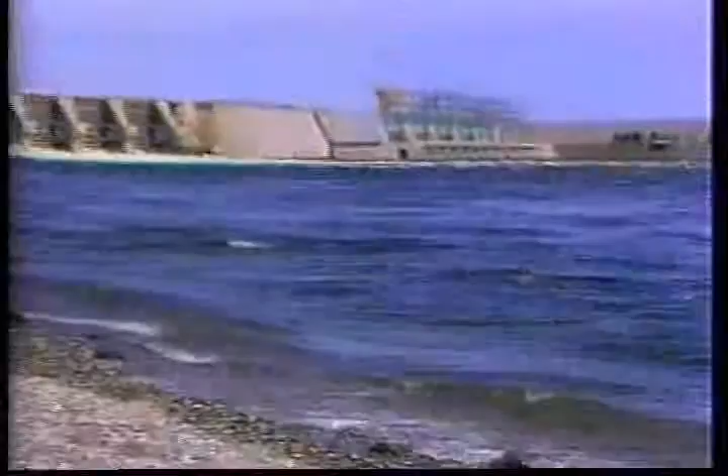The Columbia River Basin, one of the largest in North America, spans 7 of the United States and reaches far into Canada. This 219,000 square mile drainage area includes approximately 3,000 square miles of waterways, lakes, and storage reservoirs.

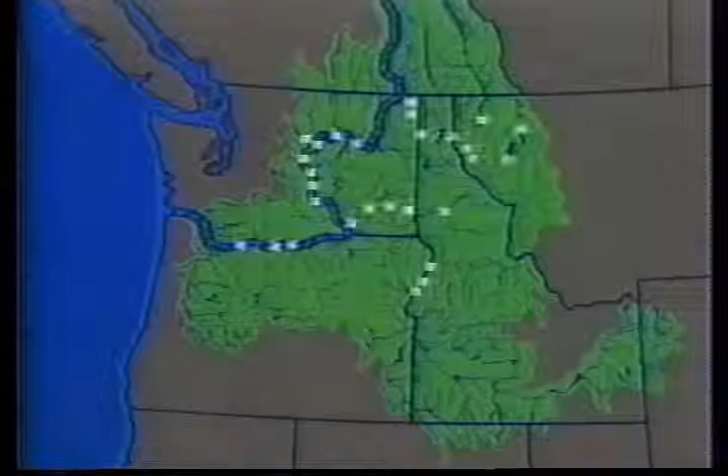Originating in Canada, the Columbia River twists over 1,200 miles and descends approximately 3,500 vertical feet on its way to the Pacific Ocean. In all, 25 dams span the Columbia River and its tributaries, enhancing navigation, fishing, wildlife, and recreation while providing water storage, flood control, irrigation, and hydroelectric power for the Northwest.

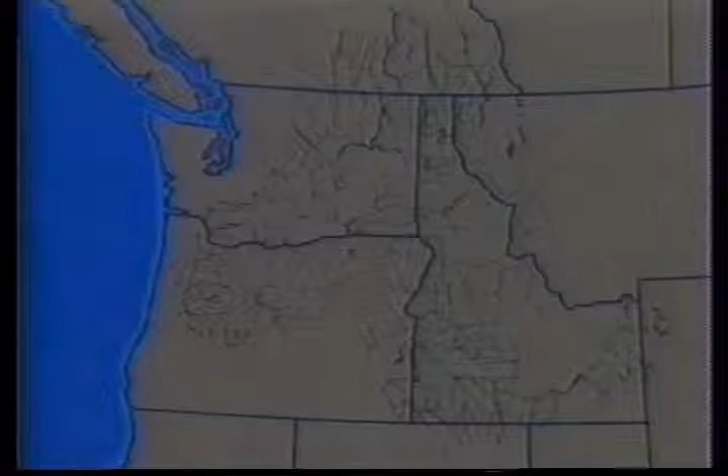This presentation will address the 7 hydroelectric projects located on the main stem of the Columbia in central Washington, but it will focus on the control system known as Mid-Columbia Hourly Coordination that continuously manages the flow of the river through these projects. This 7-dam system includes Grand Coulee, Chief Joseph, Wells, Rocky Reach, Rock Island, Wanapum, and Priest Rapids.

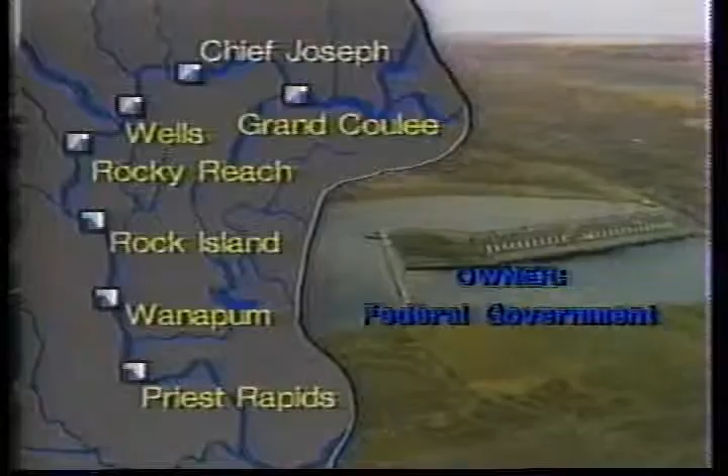Grand Coulee, a federal project operated by the Bureau of Reclamation, is by far the largest in the system. It is the uppermost project and provides priming for the system with over 5 million acre-feet of storage in Lake Roosevelt. Chief Joseph, located 51 river miles downstream from Grand Coulee, also a federal project, is operated by the Corps of Engineers. BPA markets the power generated from these 2 federal projects.

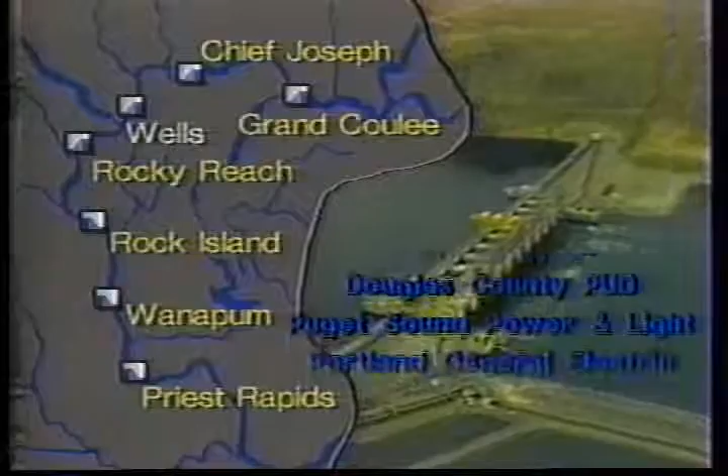Wells is owned and operated by Douglas County PUD. This project is located 30 miles from Chief Joseph. Participants of output from this project include Douglas County PUD, Puget Sound Power and Light, Portland General Electric, Pacific Power and Light, Washington Water Power, and Okanogan County PUD.

Rocky Reach, located about 41 miles below Wells, is owned and operated by Chelan County PUD. Participants of this project are Chelan County PUD, Puget Power, Colockum Transmission, Portland General Electric, Pacific Power, Washington Water Power, and Douglas County PUD.

Rock Island, also owned and operated by Chelan County PUD, is only 20 miles from Rocky Reach. Puget Power and Chelan County PUD share the output of this project.

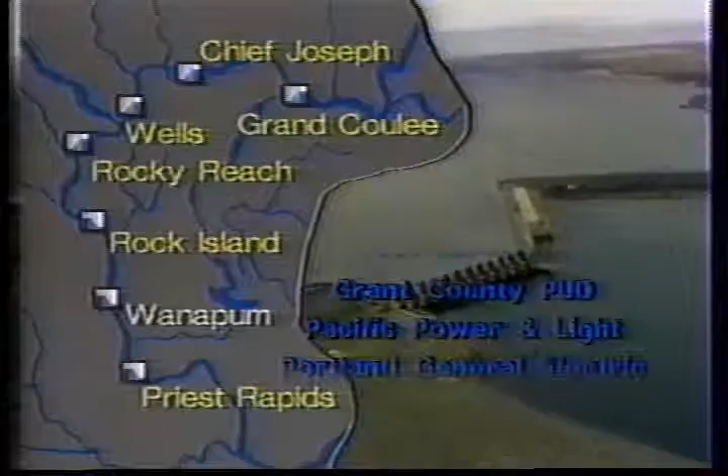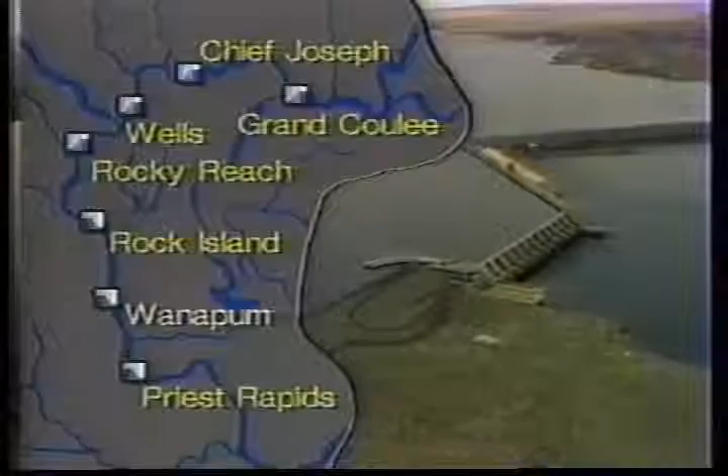Wanapum is located approximately 37 miles from Rock Island and has the largest storage reservoir of the non-federal projects. Participants include Grant County PUD, Pacific Power, Portland General Electric, Puget Power, Washington Water Power, Cowlitz County PUD, Eugene Water and Electric Board, and the cities of Forest Grove, McMinnville, and Milton Freewater.

Priest Rapids, the southernmost project in the system, is 18 miles from Wanapum. Participants include those who share in Wanapum, as well as Seattle City Light, Tacoma City Light, and Kittitas County PUD. The Priest Rapids project, which includes the Wanapum and Priest Rapids developments, is owned and operated by Grant County PUD.

These 7 projects and over 15 participants have united together into the Mid-Columbia Hourly Coordination System. In order to fully appreciate how these 7 projects work together, it's necessary to have an understanding of 4 major characteristics that are common to all projects that affect power generation.

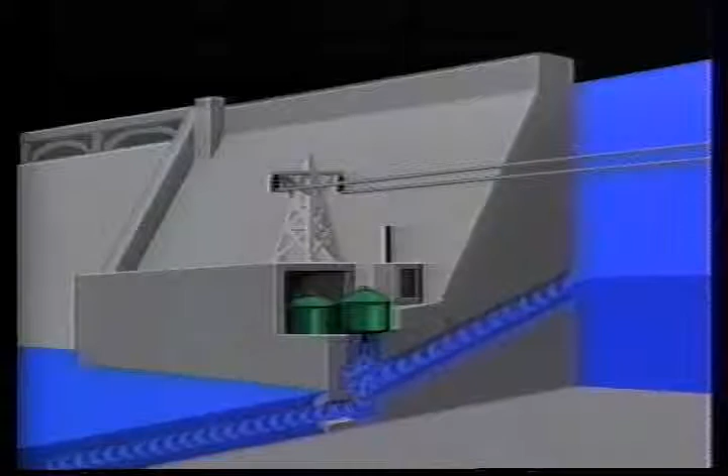This project profile will help explain these characteristics. They are storage, hydraulic head, hydraulic capacity, and generating capacity.

Storage is the ability of a project to impound water. The dark area represents the unusable or dead storage required to maintain the minimum reservoir elevation. The light area is the active storage used to regulate river flow and power generation.

The difference in elevation between the reservoir's surface and the tailwater is called hydraulic head. The maximum flow that can pass through the turbines is called the hydraulic capacity. Generating capacity for each project is the maximum power generation possible.

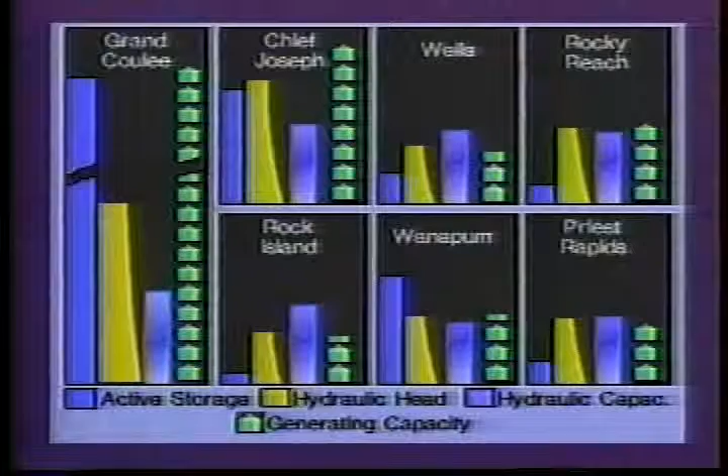This chart shows the diversity between the projects and highlights the complexity of maintaining a coordinated system. One of the prime objectives of hourly coordination is to keep the 6 reservoirs downstream from Grand Coulee full in order to maximize power output and to reduce radical fluctuations in forebay levels.

This objective is partially achieved by priming, which occurs when Grand Coulee generates additional power to increase the inflow to the downstream projects. This priming maintains the downstream forebay elevations at higher levels. It provides for additional generation downstream while using only a small portion of Grand Coulee's active storage.

As an example, water moved from Grand Coulee and distributed among the active storage areas of all 6 downstream projects would increase their hydraulic heads.

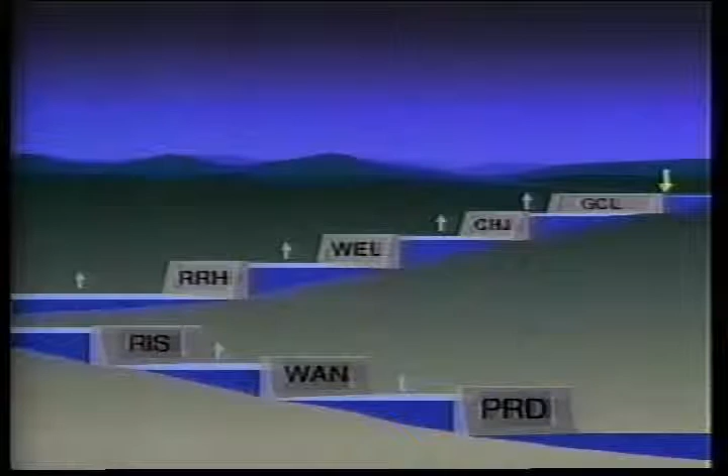A 50-foot head gain throughout the lower 6 projects could be achieved with only a half-foot head loss at Grand Coulee. This net increase in hydraulic head throughout the system at a flow rate of about 70,000 cubic feet per second would result in a power gain of about 250 megawatts.

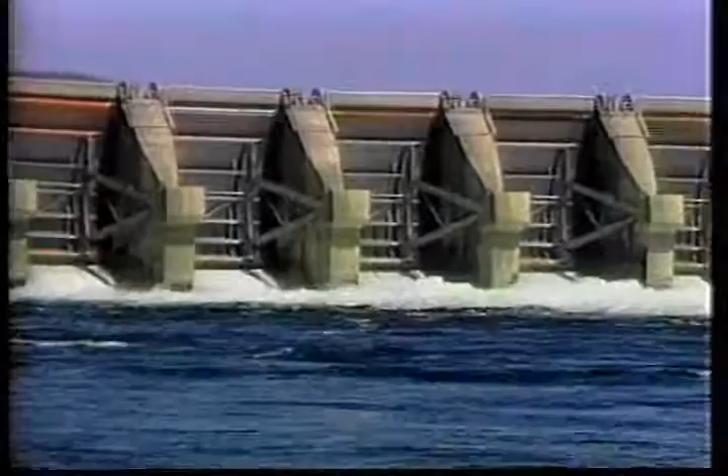This is an extreme example, but it illustrates one of the purposes and benefits of effective and efficient management through hourly coordination.

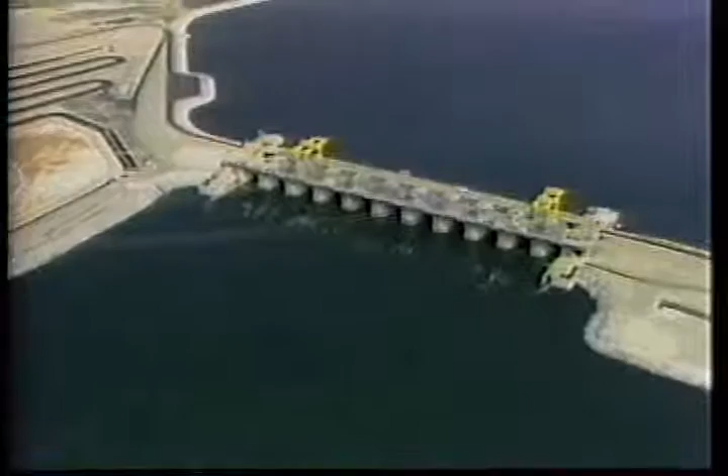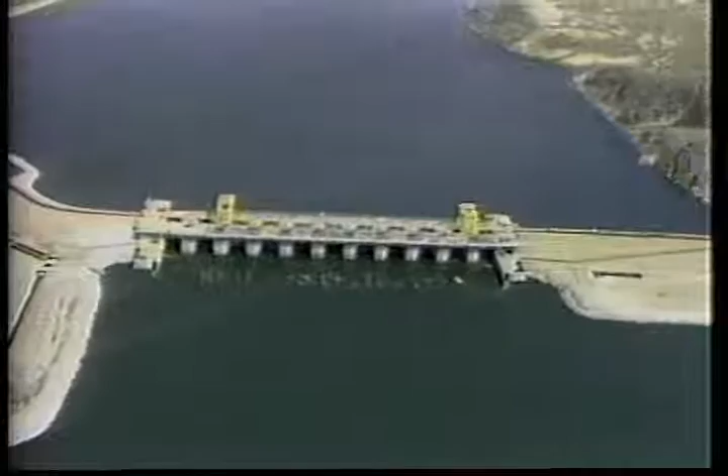Since the implementation of hourly coordination, these 7 projects are now operating at a level that ensures the most efficient and optimum production of hydroelectric power.

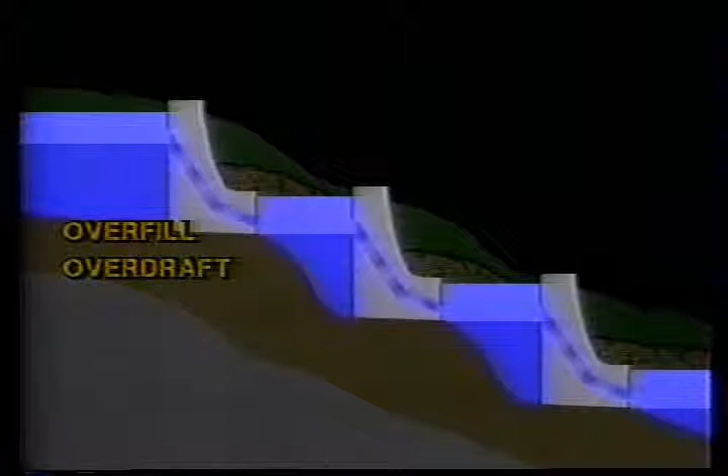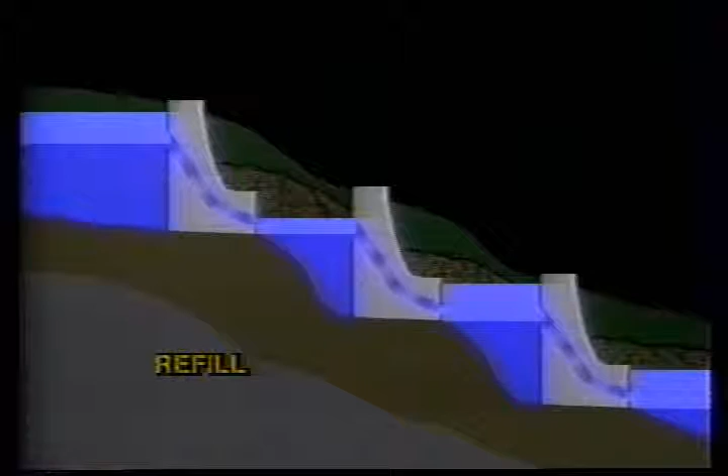The purpose of the refill logic is to keep a project full. This logic system activates the priming relationship between the projects.

The approaching overdraft logic senses a lowering of the reservoir level and attempts to slow the draft rate as it approaches minimum operating elevation by reducing its discharge.

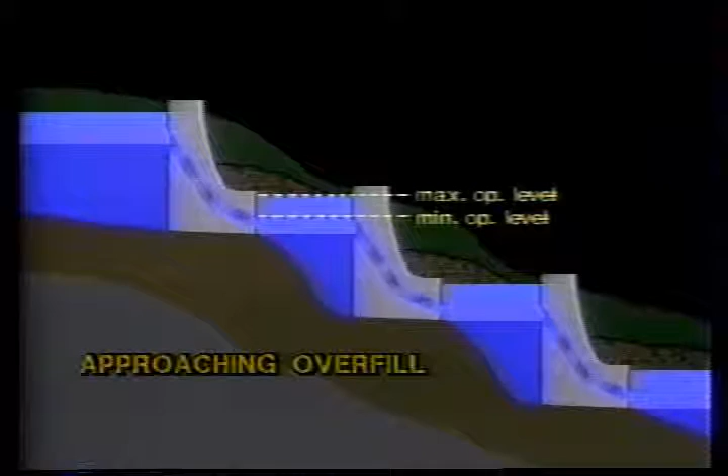The approaching overfill logic senses a rising of the reservoir level and attempts to slow the fill rate as it approaches maximum operating elevation by increasing its discharge.

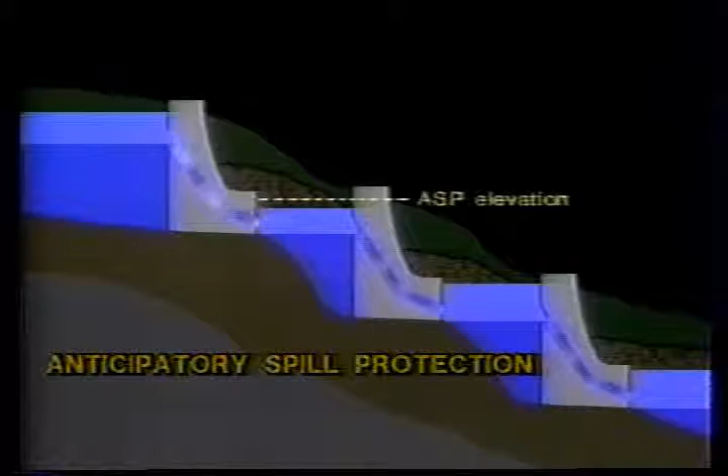The anticipatory spill protection logic attempts to maintain a project's reservoir elevation below a specified ASP elevation by increasing the project discharge. The increased available storage is then held in anticipation of receiving inflow that would otherwise have caused the project to overfill and spill.

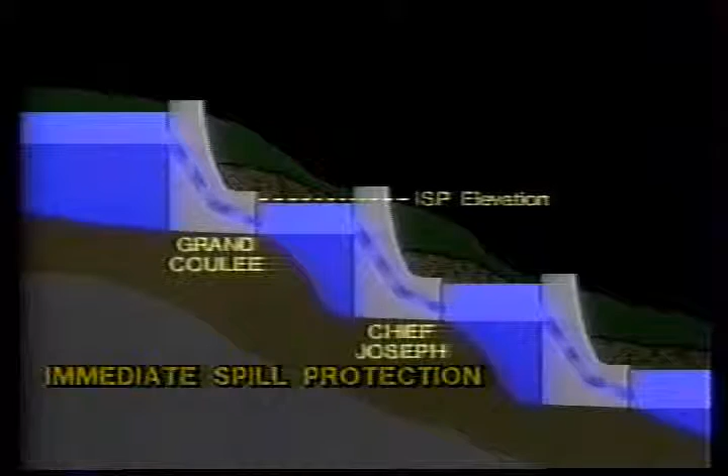The immediate spill protection logic attempts to maintain the Chief Joseph Reservoir elevation below a specified ISP elevation by reducing the Grand Coulee discharge.

Overdraft and overfill logic levels are the highest priority controls. The overdraft logic is activated when the reservoir level would be less than the minimum operating level within 1 hour at the current draft rate.

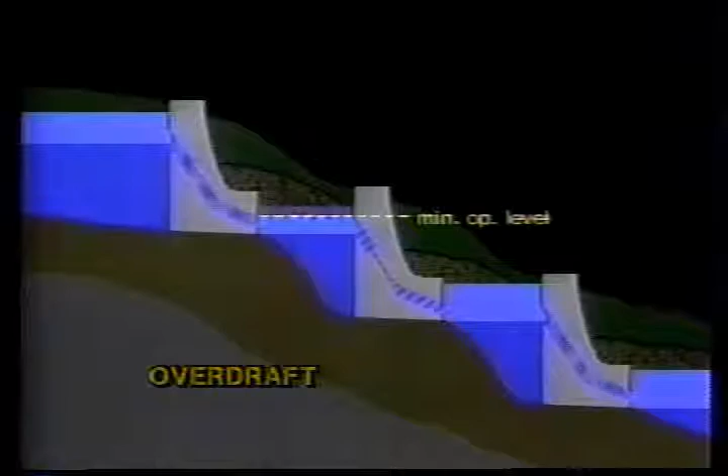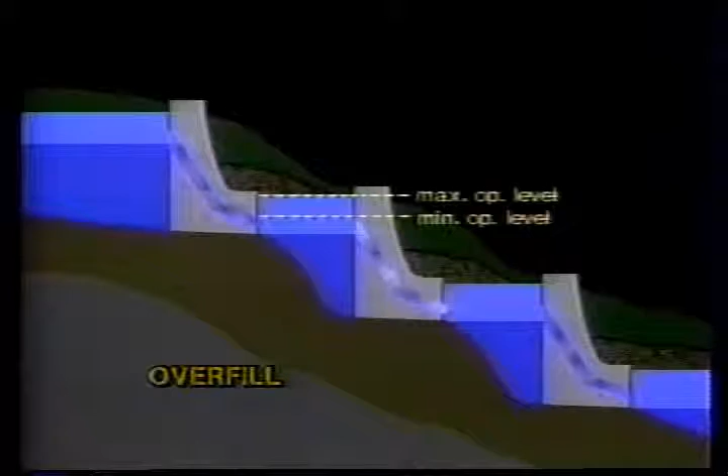It attempts to maintain the reservoir level above a minimum by reducing the discharge. The overfill logic is activated when the reservoir level would be over the maximum operating level within the hour at the current fill rate. It attempts to maintain the reservoir level below maximum by increasing the discharge.

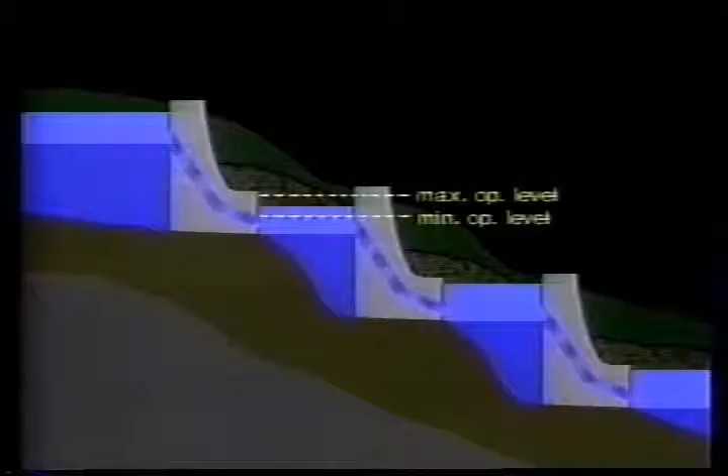The software containing all the logic for controlling the physical operation of the projects in the Mid-Columbia is called the operating strategy. Unless manually overridden, this strategy is in constant control of the 7 projects, monitoring all their operations and dispatching generation requests every 4 seconds.

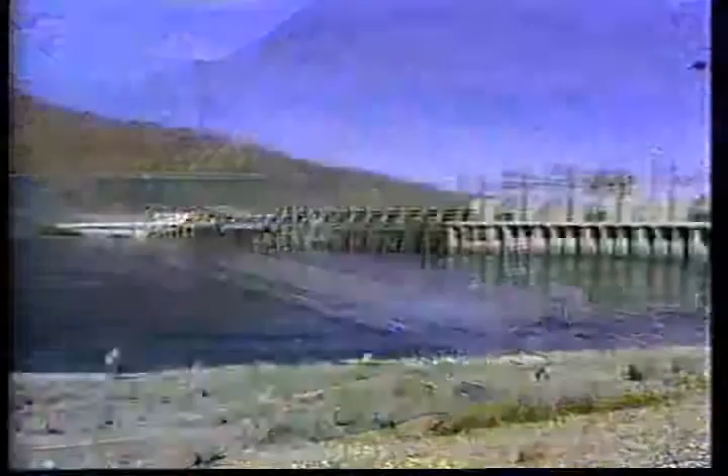We have shown that the fluctuation of the river, and therefore the physical operation of the projects, are controllable. We will now show how efficient power production is achieved by distributing the Mid-Columbia generation requests among these 7 projects. This process works as follows.

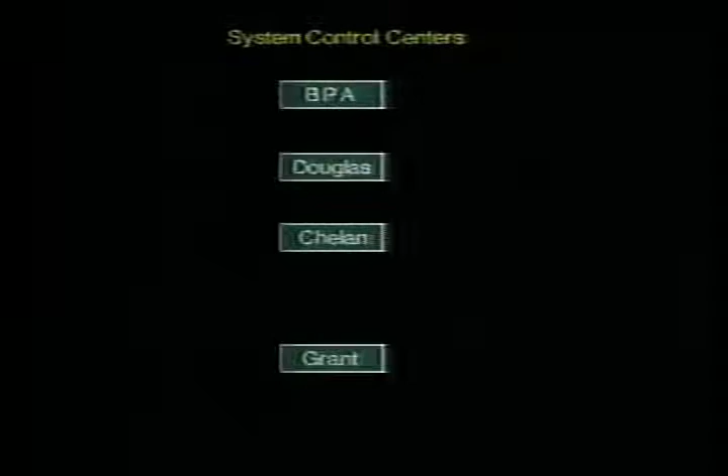Grant PUD, Chelan PUD, Douglas PUD, and BPA each operate a system control center for their respective projects. These system control centers receive the uncoordinated generation request from the participants at each project. These requests are called uncoordinated because most participants will submit their requests without knowledge of the magnitude of requests being submitted simultaneously by other participants.

Prior to hourly coordination, these uncoordinated requests went directly to the projects. This often resulted in overfilling and spilling at some projects and overdrafting at others. Now, a coordinated operation is achieved by making adjustments prior to dispatching these requests to the various projects. This adjustment process takes place every 4 seconds.

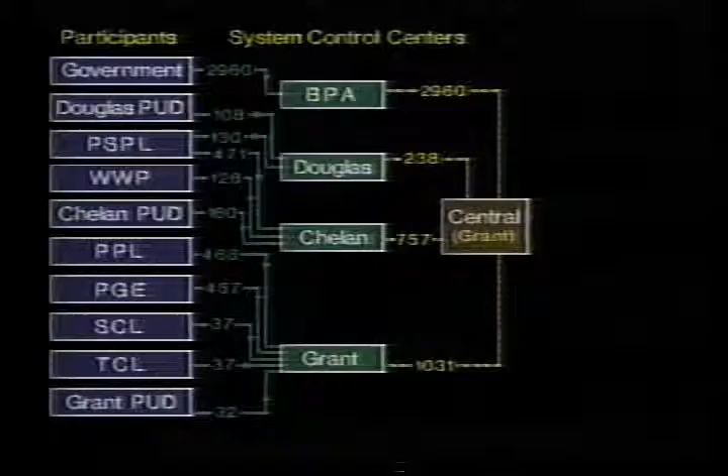It begins by totaling the uncoordinated generation requests for each project at the System Control Center. The total raw request for each project is then transmitted to Central. Central is the control center for the entire system of projects and is located at Ephrata, Washington, in Grant County PUD's control facility. Central adds these raw requests together to determine the total generation requested of the Mid-Columbia system.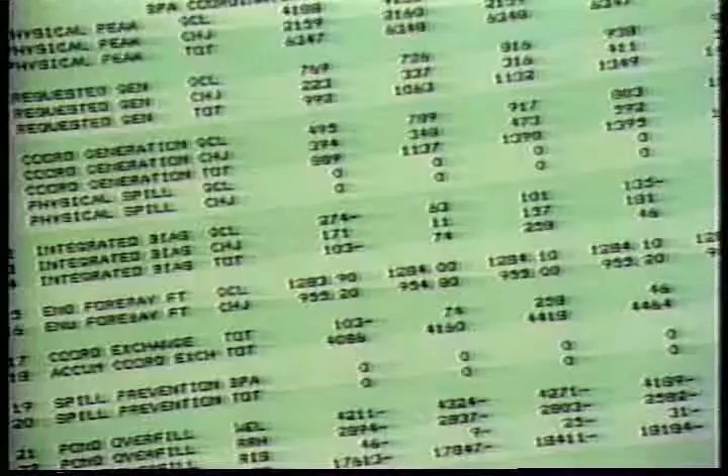Central then determines the optimal generation needed from each project to meet this total requirement. This is called the adjusted or coordinated generation requirement. This adjustment process maximizes the use of water passing through each project while meeting the total generation requested of the Mid-Columbia system. For each project, the difference between the adjusted or coordinated requests determined by Central and the raw or uncoordinated requests submitted by the participants is called bias.

This bias can be positive or negative. Central transmits 7 computed generation bias values, one for each project, to the 4 system control centers.

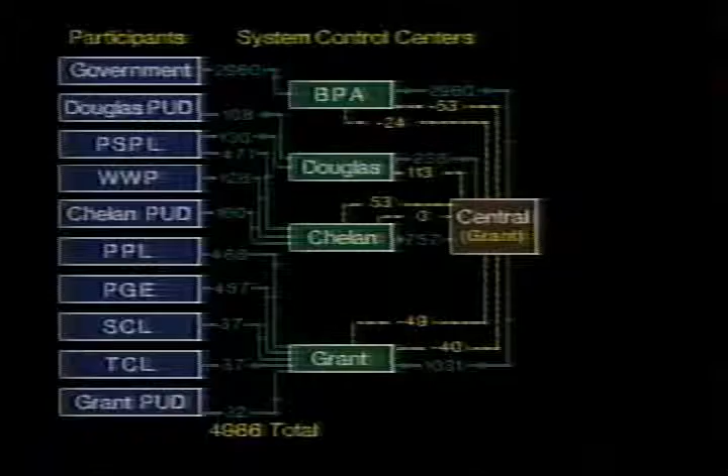Upon receipt of this transmission, the system control centers proceed to determine and dispatch coordinated generation requirements to their respective projects. An important point to remember is the sum of all project bias values throughout the system is always equal to 0. Central is simply redistributing the requests among the 7 projects and is not adding to or subtracting from the generation requests of the various participants.

Let's review this process. Each of the participants submits an uncoordinated request to the System Control Center. The System Control Center totals the requests from all participants and transmits a raw request to Central.

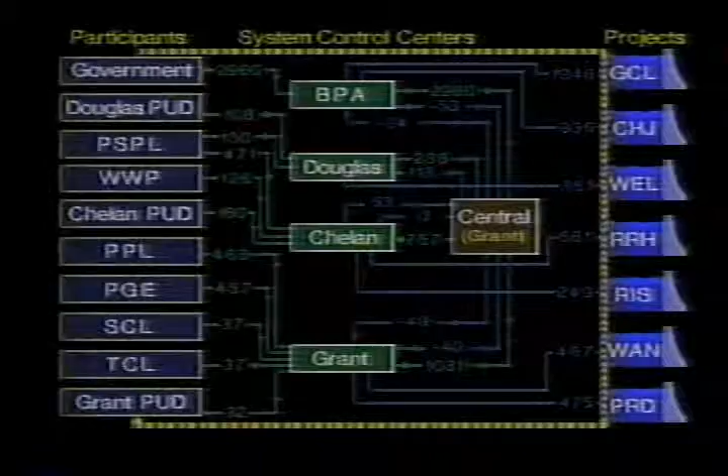Central compiles these raw requests, determines optimal generation values, and transmits bias values back to the system control centers. The system control centers then send an adjusted generation requirement to each project. Finally, the loop is closed when each participant receives the amount of generation that it had requested for its system.

Let's now look at the parameters which govern the operating strategy of hourly coordination.

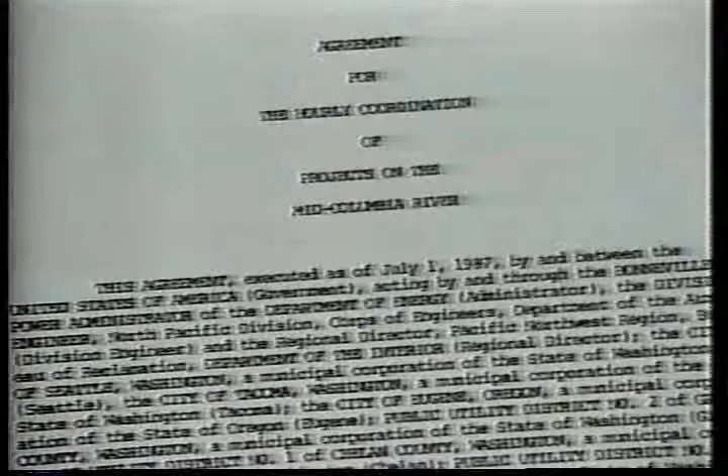All rights and obligations that prevailed prior to the inception of hourly coordination are preserved by the Mid-Columbia Hourly Coordination Agreement. Rights and obligations apply in two categories, first to the projects, then to the participants. Project owners and operators have the right to operate and maintain the projects in a safe and efficient manner. They are obligated to operate the projects in compliance with existing law and controlling regulations.

Legal non-power requirements, such as fish spill, have precedence over power requirements when applicable. Projects are obligated to serve the needs of the participants according to the agreements or arrangements that prevail. Each participant has the right to its share of each project's inflow, generating capacity, and the pondage.

The participants have the right to request generation on a moment-by-moment basis. The participants are obligated to schedule and request generation in such a manner that the following obligations are fulfilled when applicable: prevent overfill or overdraft of the reservoir, request no more than its share of the project's capacity and use no more than its share of the project's pondage, and refill its share of the project's pondage in a timely manner and avoid spill or wasted energy.

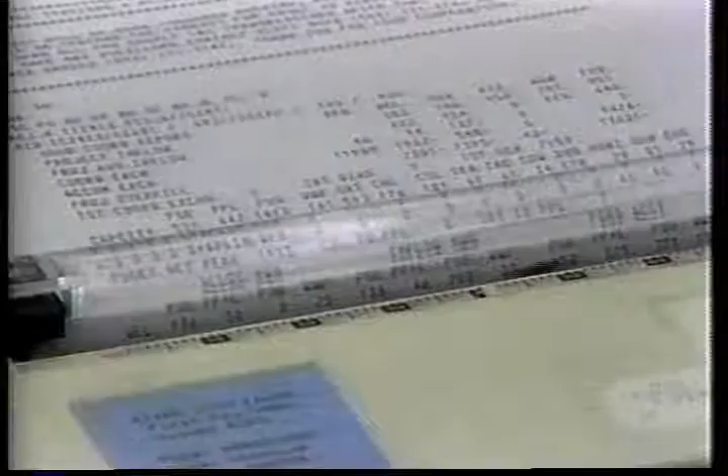In order to preserve these rights and obligations and to satisfy FERC requirements, accurate records are maintained of each project's operation. Just as operating strategy controls the physical operation of the seven projects, an accounting software package is used to reconcile every detail of project operation and participant use.

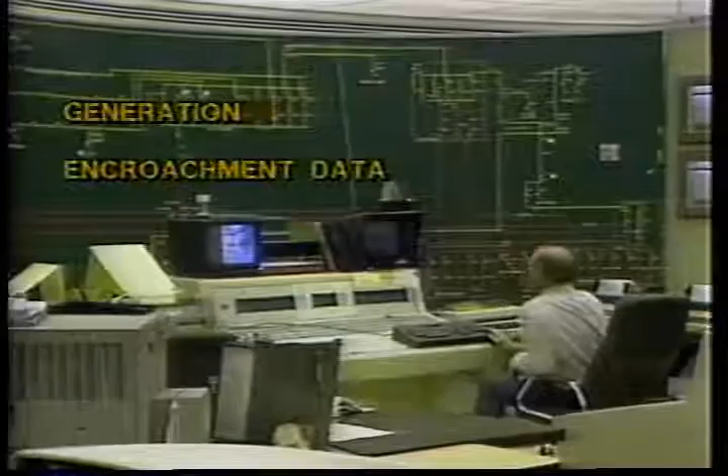At the end of each hour, the system control centers report each project's generation, encroachment data, plant discharge, physical spill, fish spill, and reservoir elevation, as well as other pertinent data, to Central over the Columbia Basin Teletype Network, or CBTN.

Central stores this project data and other information in a database which is used to produce logs for each project and all participants.

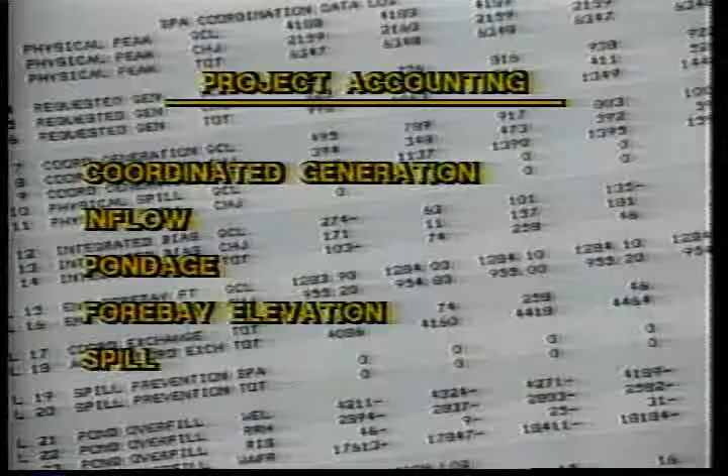Accounting records are maintained for both projects and participants. Project accounting records include coordinated generation, inflow, pondage, forebay elevations, spill, and other pertinent data resulting from the project operation. For each participant, accounting records include requested generation, spilled energy, inflow, allocated requests, pond accounts, and other pertinent data. A daily microfiche is produced by Central and transmitted to all participants wishing to maintain their own record of operation.

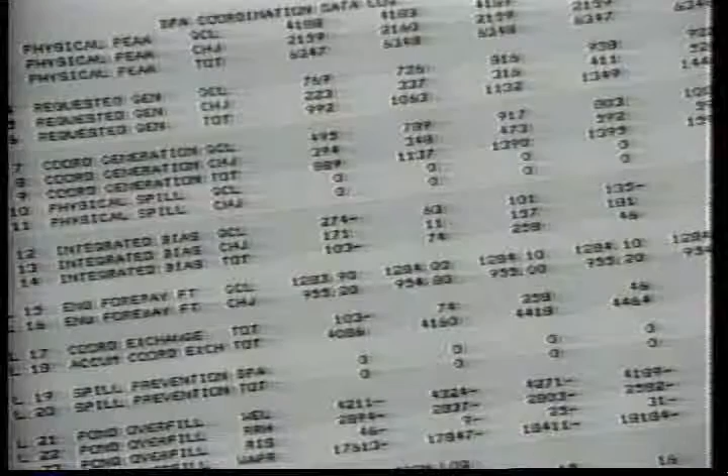Three important factors must be reconciled in the accounting process: the percentage of inflow for each participant versus the total inflow at a given project, the physical pond versus the project pond account, and coordinated generation versus the allocated generation.

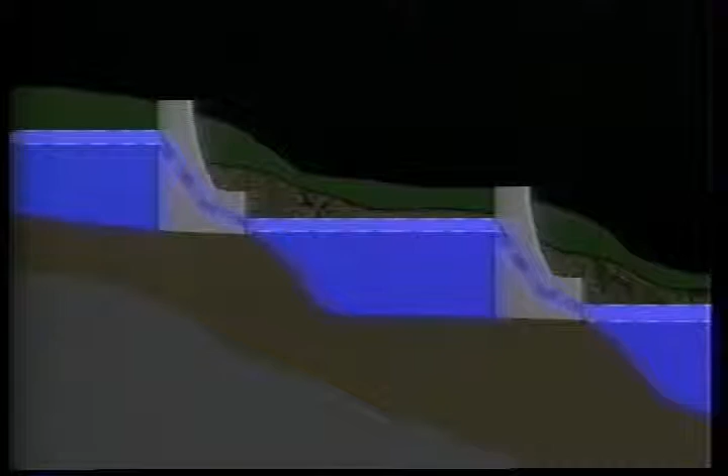Inflow is the water, measured in megawatts, that comes into the active storage area of any project. The inflow is determined each hour by adding the change in the forebay elevation, converted to average megawatts, the total power generated, and any spill that occurred that hour.

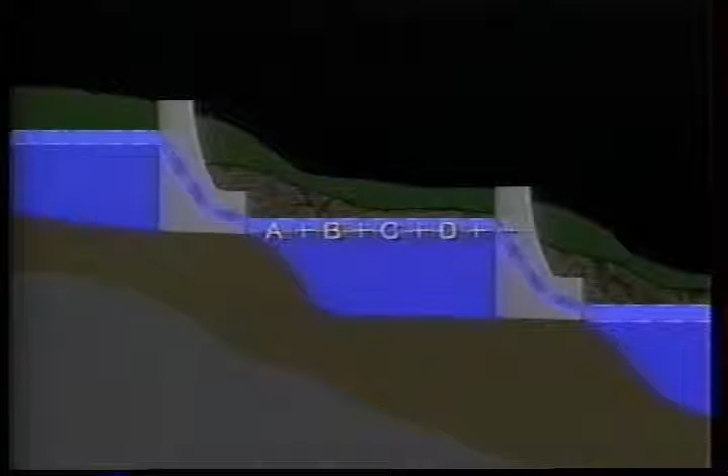Each participant in that project is entitled to its percentage of the total inflow according to its contractual share of the project. To prevent sharp increases and decreases in calculated inflow not attributed to normal river flow and fluctuation, the inflow is averaged over a rolling 12-hour period.

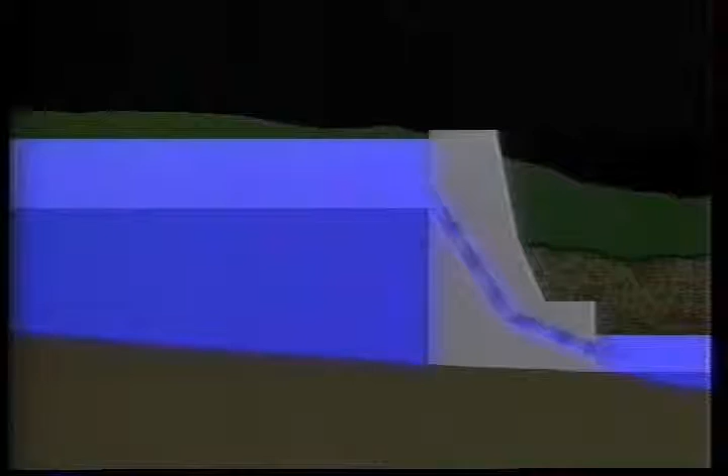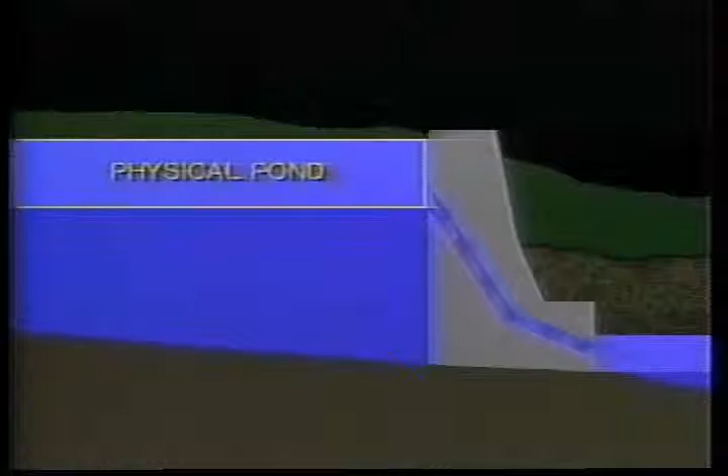Another important point to make clear is the distinction between physical pond and the project pond account. Physical pond refers to the water expressed in megawatt hours present in a project's active storage at any given time. The project pond account is the on-paper equivalent, expressed in megawatt hours, of the physical pond used for accounting purposes at the end of each hour.

Just as each participant has an entitlement in the project's physical pond, each participant has an entitlement in the project's pond account. A project's pond account is equal to the total of the participants' pond accounts.

The difference between coordinated generation and allocated generation is a complex concept. Coordinated generation refers to the actual generation at a project for a given hour. It is the sum of the total raw requests submitted by the participants and the bias value determined by Central.

Allocated generation refers to the computed, for accounting purposes, generation at a project for a given hour. It is the sum of the generation values that Central determines as having been received from that project by each participant, according to a pre-specified allocation process established by the participants.

The difference between coordinated generation and allocated generation is called coordination exchange. Let's look at an example of the accounting process.

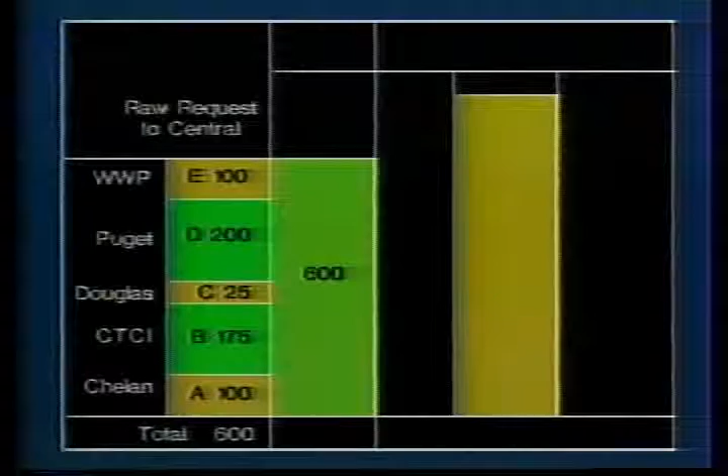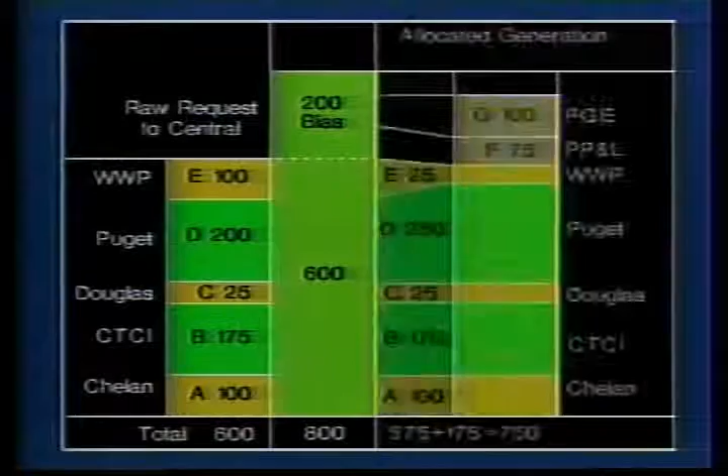Say 5 participants submit raw generation requests at Rocky Reach totaling 600 megawatts. A bias of 200 megawatts comes back from Central, and Rocky Reach generates a total of 800 megawatts. At the end of the hour, Central allocates the generation on the basis of the participants' pre-specified allocation process.

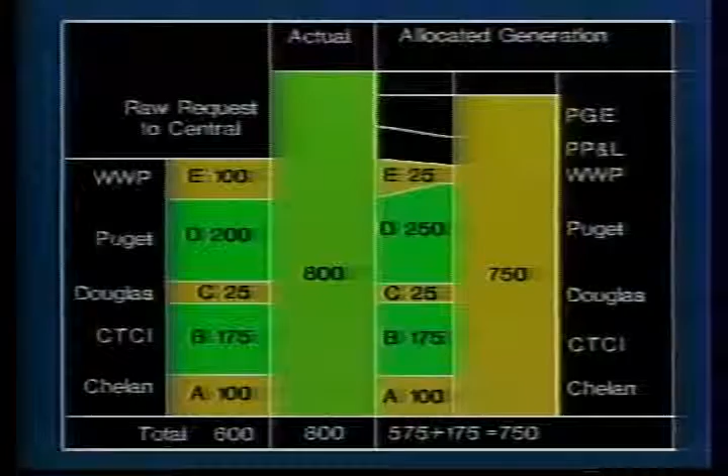The total Rocky Reach allocated generation for the 5 participants is determined to be 575 megawatts. Notice that 2 additional participants who sent raw requests elsewhere have been allocated generation of 175 megawatts at Rocky Reach. This brings the total allocated generation up to 750 megawatts. The difference between the actual generation, 800 megawatts, and the allocated generation, 750 megawatts at Rocky Reach, is coordination exchange, or in this case, plus 50 megawatts.

For the Mid-Columbia projects as a group, the total coordinated generation is always equal to the total allocated generation on an hourly basis. The difference in the 2 quantities at each project is equal to the coordination exchange. It then follows that the sum of all project coordination exchange values is 0 on an hourly basis. This is true because Central is neither adding to nor subtracting from each participant's total Mid-Columbia generation request. Central is simply redistributing each participant's total generation request among the projects and calling the redistributed quantities allocated generation values.

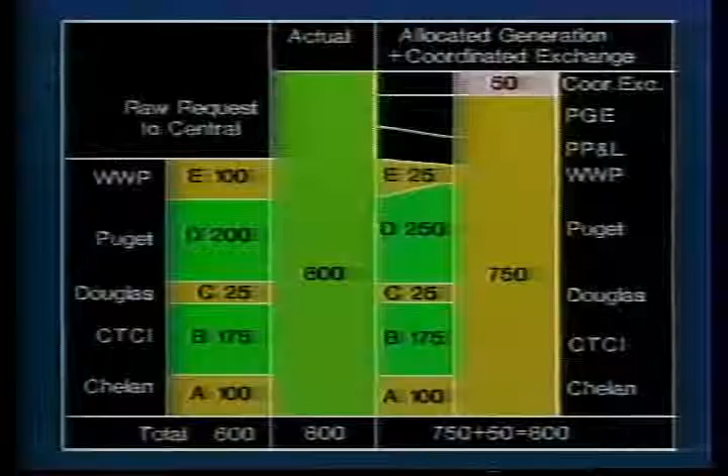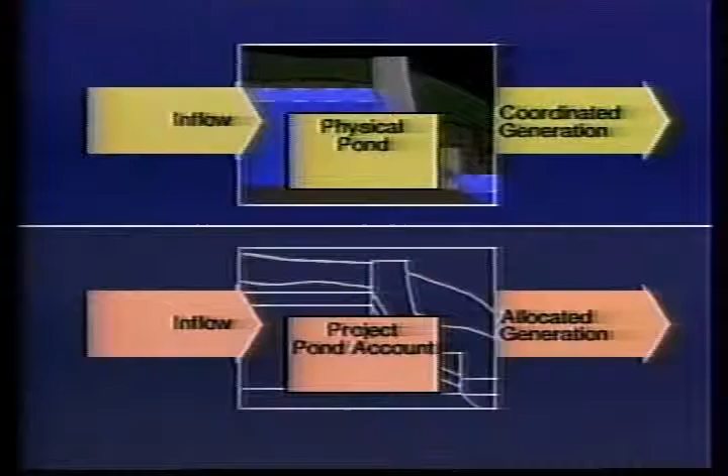For each project, the total coordination exchange incurred since the inception of hourly coordination is called accumulated coordination exchange. In a simplistic way, the difference between a project's pond account and its physical pond can be seen as accumulated coordination exchange. This can be understood by noting that inflow and allocated generation are the variables which cause changes in the project pond account, while inflow and coordinated generation are the variables which cause changes in the physical pond.

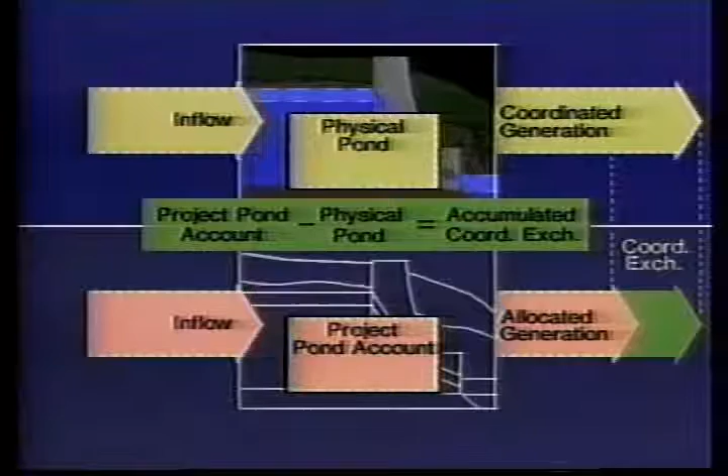At the inception of hourly coordination, project pond account and physical pond were equal at each project. Since that time, however, the two quantities have virtually never been equal because allocated generation and coordinated generation values are almost never equal. The accumulated difference between coordinated and allocated generation values at each project from the inception of hourly coordination is equal to accumulated coordination exchange. It therefore follows that the difference in project pond account and physical pond is also equal to accumulated coordination exchange.

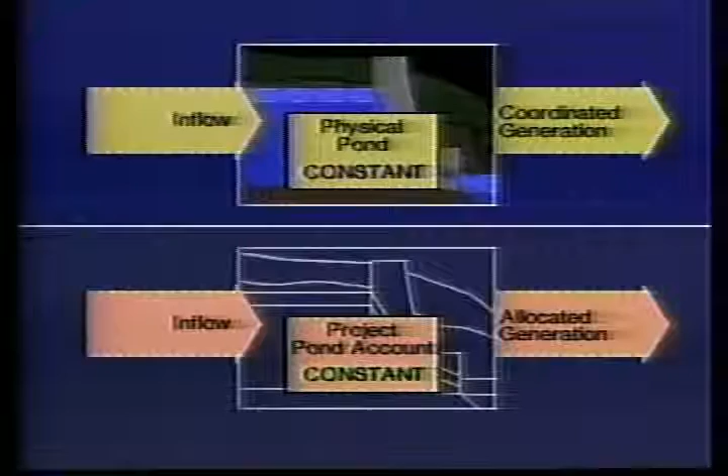At each project, the physical pond and the project pond account will fill, draft, or remain essentially constant over a period of time depending upon the prevailing relationships between inflow, coordinated generation, and allocated generation. With inflow taken into account, a project can take on one of the following characteristics. If inflow and coordinated generation are the same, the physical pond will remain constant. Likewise, if the inflow and the allocated generation are the same, the pond account will also remain constant.

If the inflow is greater than the coordinated generation, the physical pond will fill. If the inflow is greater than the allocated generation, the project pond account will also fill. And if the inflow is less than the coordinated generation, the physical pond will draft. Likewise, if the inflow is less than the allocated generation, the project pond account will again draft.

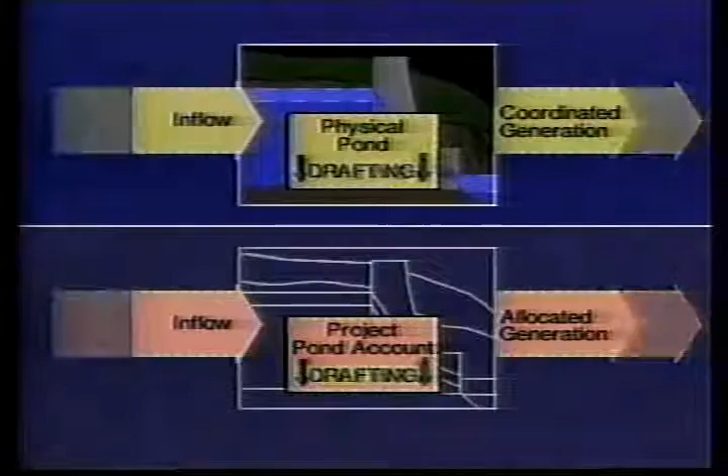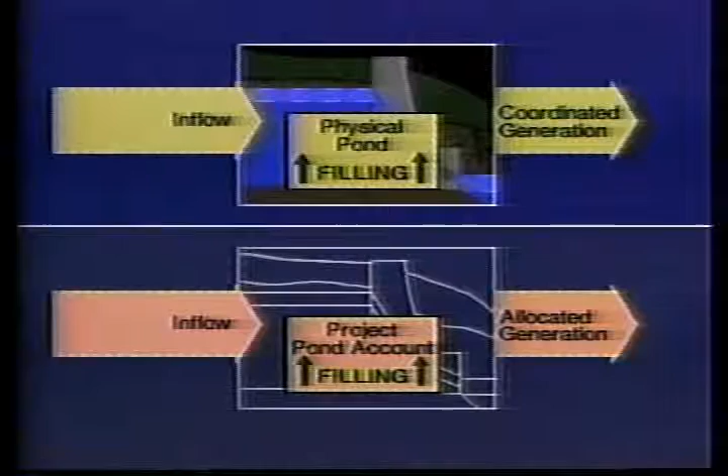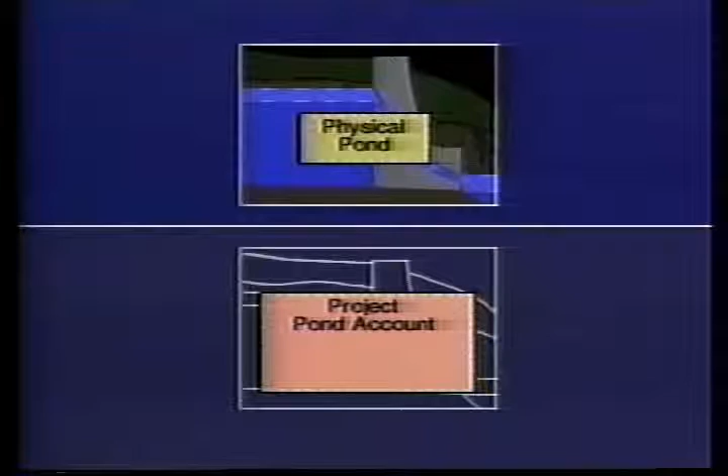The prevailing relationships between inflow, coordinated generation, and allocated generation can be such that the physical pond and the project pond account will trend in the same direction or in opposite directions at any given point in time. That is, one may be filling while the other is drafting, and vice versa. Because a project's physical pond has a limited capacity and a project's pond account doesn't, when a project's pond account is larger than the project's physical pond, we get into what is called deferred spill.

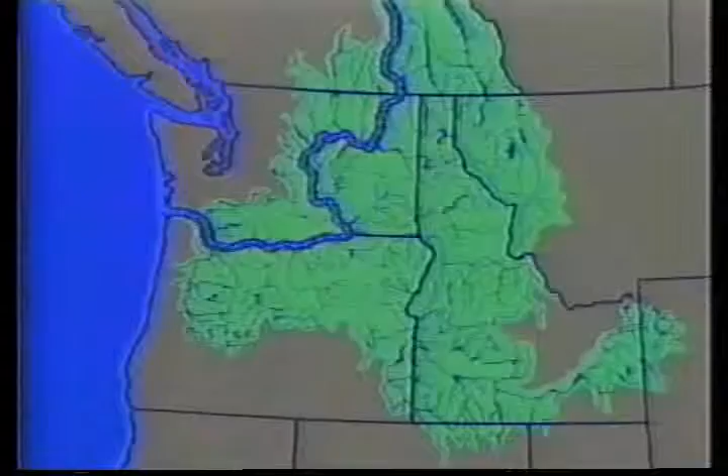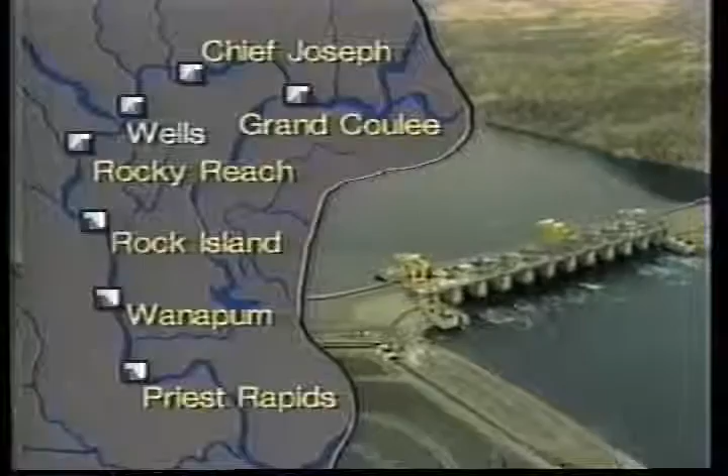The accounting process is a complicated process, but it has kept the Mid-Columbia system providing power efficiently to the Northwest for the past 15 years. A major benefit to the participants of hourly coordination is the continuous management of a vast resource which responds to a major portion of the demands of the electrical customers of the Pacific Northwest on a moment-by-moment basis throughout the day. This continuous management minimizes the unorganized operations which frequently occurred prior to the inception of hourly coordination.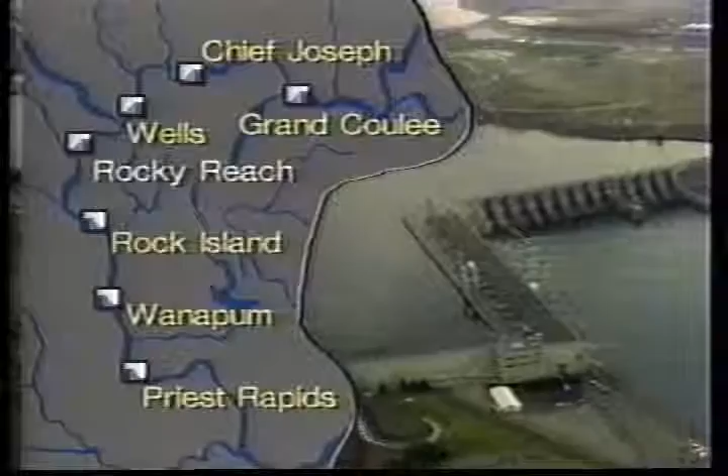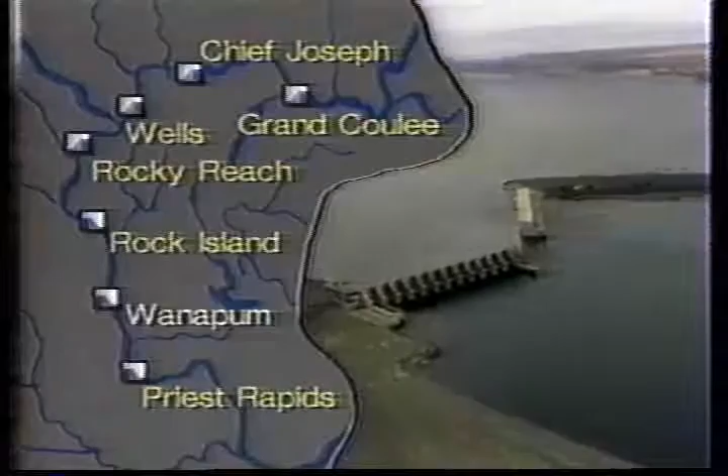The arrangements described throughout this video represent an automated system that manages the smooth operation of over 8,000 megawatts of generation capacity. Dispatchers and schedulers are a valuable part of hourly coordination for all utilities. The dispatchers and schedulers represent the human portion of the man-machine interface that keeps hourly coordination in a continuous operation. They have the responsibility to ensure that utilities stay within the bounds of their rights and obligations. It is they who ensure that the resources of the Mid-Columbia operate in harmony with the resources of the entire Pacific Northwest.